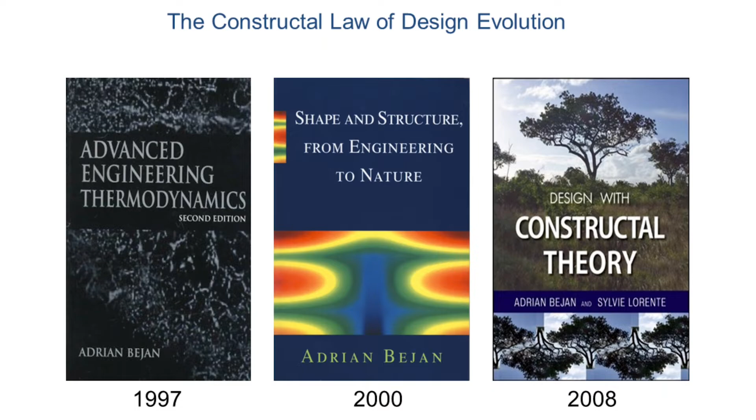In fact, the thermodynamics and the heat transfer and the design that I just mentioned constitute one subject, which is the science of design, or the science of form and then evolution of form in the direction of greater usefulness. My research is the same as my teaching. One is the other, like the hand in the glove.

And the courses that I teach are on thermodynamics, which are illustrated in the book covers that I'm putting in this video. The same with heat transfer. And when it comes to evolutionary design, also known as constructal design, I have spearheaded that domain of science as well.

My view of scholarship, which, by the way, is what I'm teaching to the students who come to me, is that the primary purpose of being in university is to learn how to engage productively in doing creative work. Creative work, as the word indicates, means the ability to come up with new ideas, and then with the force to implement those ideas, with the audacity to do something different, something that may be more useful.

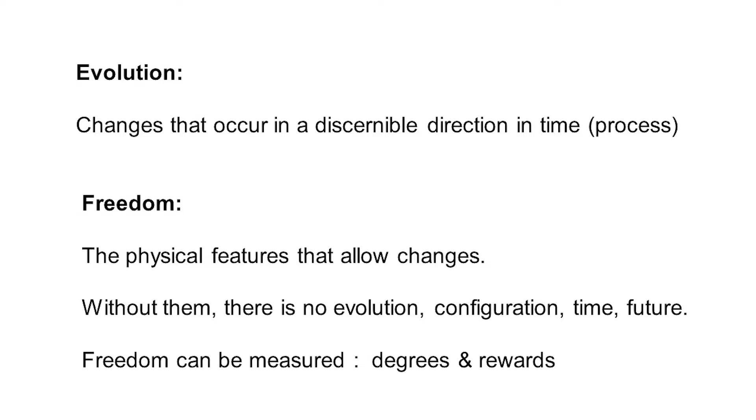Second, freedom is the one word for all the physical features that endow the object or the system with the ability to change. No freedom, no change, no evolution, no configuration for that matter, because configuration comes from an evolving design, and that means no direction of time and no future.

Now, it may surprise you to know that freedom can be measured. We can measure it, as I will show, as the number of degrees of freedom that the object has at its disposal. And also, freedom can be measured in terms of the effect of these degrees of freedom on performance, efficiency, and benefit to the user.

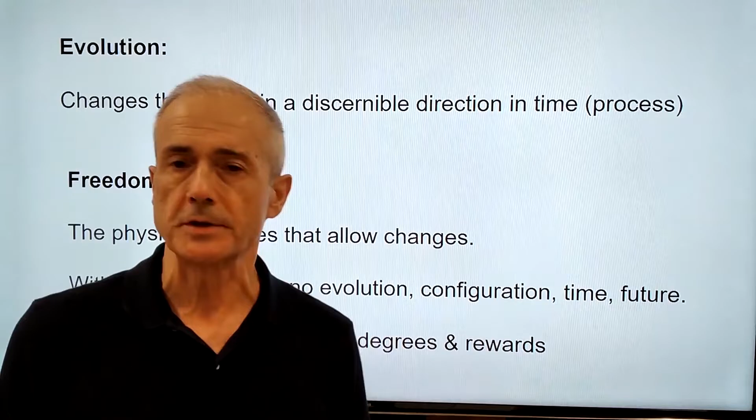We get this idea even better if we question the meaning of evolutionary design. Here I have an icon of where we all come from and where we're going. Everything in nature is a moving system that morphs with freedom.

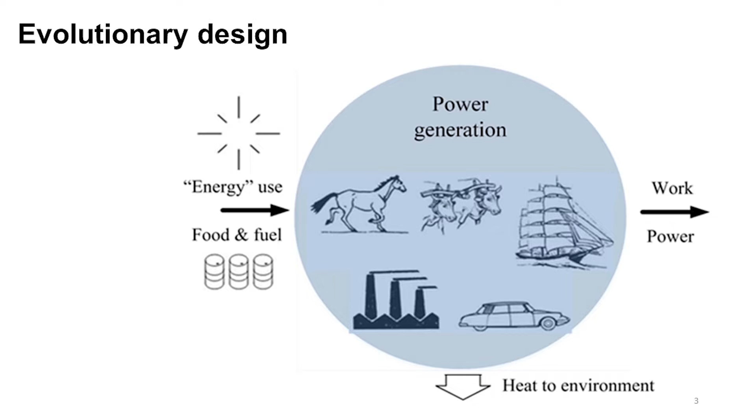This is an icon of the book of Thermodynamics. We call it a thermodynamic system. In the blue domain, it is powered by heating from a source. This energy stream is converted partially into work or power, and the remainder is discharged necessarily to the ambient.

In the blue domain, I sketched many configurations, some very old, some a lot newer, and they suggest that the design that facilitates the converting of heating into work has been evolving. So that is evolutionary design, and it's only half of the picture.

The complete picture is shown here in the rectangular box. The previous drawings are in the blue domain called engines, with what I just told you around the engines: heat in, heat out, and work out.

The point is that the work is dissipated instantly by moving something against its will, that is, against its environment. That movement dissipates the work completely. It dissipates it into heat.

So from a distance, and if you look again at the rectangular box, heating in, and then heat rejection 100% from the rectangular box. But in the meantime, or inside the box, movement has happened in the horizontal direction on the Earth's surface because of the presence of evolutionary designs, both in the blue domain and in the green domain.

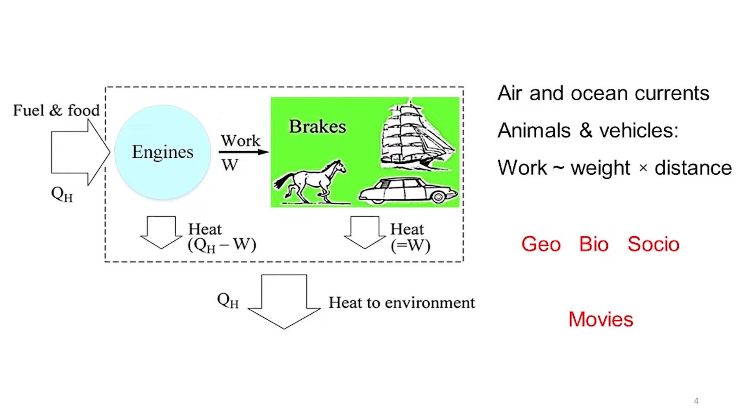So the designs are evolving toward being better, which means that through evolution, the movement itself becomes farther and more efficient and longer lasting.

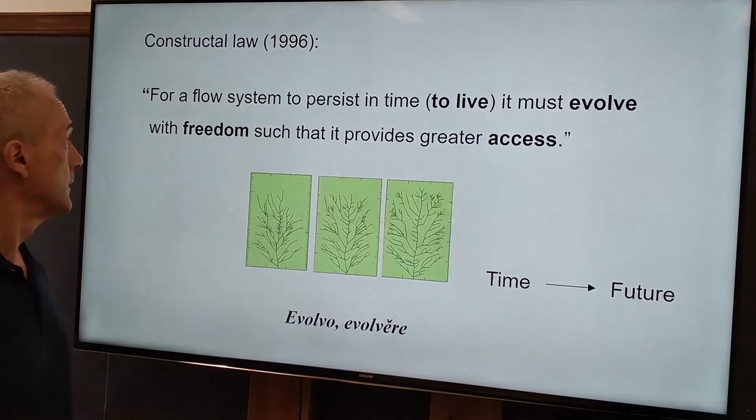To account for this new aspect of the thermodynamics that we practice, I stated in 1996 the Constructal law. I'll read it to you: for a flow system to persist in time—this is the definition of to live—it must evolve with freedom such that it provides a greater access. Let me explain.

This is the physics definition of life, because in thermodynamics we already have the physics definition of death. It's called the dead state, the being of a system where nothing moves. There's no flow, nothing changes. The boundaries are not showing deformations over time, and so on. So the life state is the antonym, the opposite of the dead state.

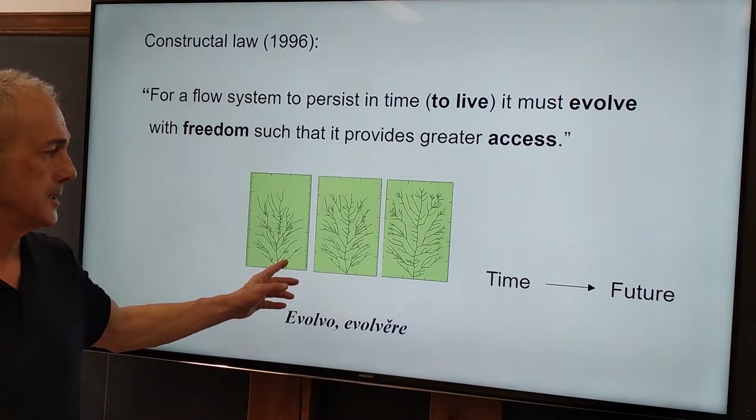I have here an example of a laboratory demonstration of the evolution in time of a river basin. From time frame to time frame, the architecture is changing, it is morphing, it is always tree-like or arborescent, but there is a direction in time which you can show through measurements. It is toward flowing more and more easily, meaning the water on this horizontal area being driven by gravity by smaller and smaller drops of altitude. The green is really sand, originally of uniform thickness, on the floor of a laboratory.

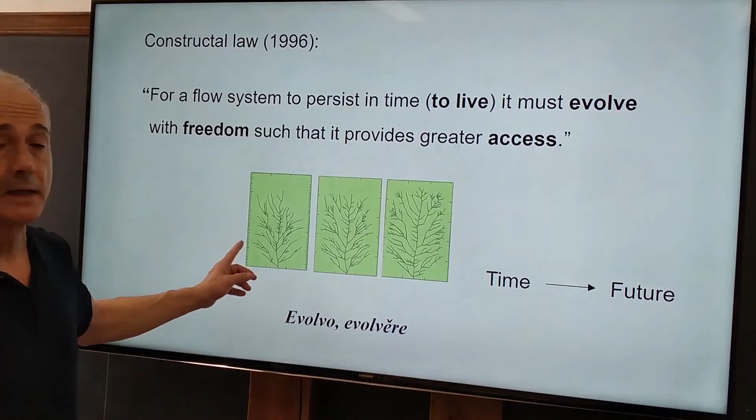And so the movie plot from left to right is in fact the time arrow, which is brought into thermodynamics by this statement.

One more thing, evolution, the concept, is as old as science itself. It comes from the Latin verb evolvo, evolvere, which means to roll out, to roll forth. This word makes the mind think of the image of childbirth. Everything that is born or nascent is due, it comes out of Mother Nature, a feminine entity.

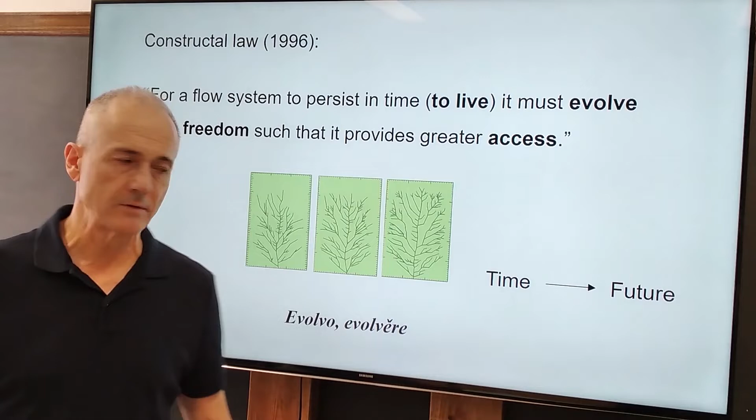Natura in Latin means that. This is a mother word that has given birth to many other words in the language of science that we speak today. I mean the word valve, vulva, or Volvo, the brand name in the Swedish automobile. All these words have the same origin as evolution itself.

Now, with this law of physics, many researchers today have shown that it is possible to predict not only the evolutionary designs that have been observed and documented, but also to predict the future of these designs over time. This is a panel of the designs that endow all sorts of systems on Earth with locomotion, that is, movement driven by power, swimmers, runners, and flyers. You have here a surprising agreement between the observed speeds of locomotion versus body sizes.

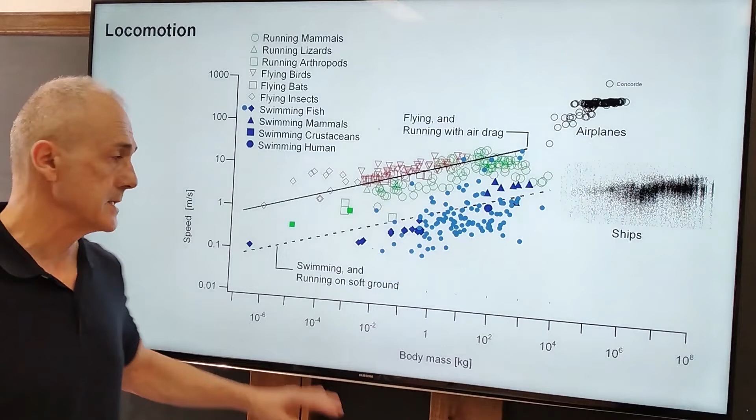The body sizes cover a huge territory from the housefly to the biggest ships. This unification of movers on Earth is a drawing coming from me that has been evolving over time. The ships are the most recent addition. They show basically agreement with the swimmers. The airplanes, they appear to be deviating from the line of the flyers.

More recently, they've been brought in line with the flyers, the animal flyers, by taking into account the fact that the density of the medium in which the fastest airplanes are traveling is sensibly lower than the density of the atmosphere against which animal flight is designed. And so this success, which is the agreement between all these dots and the theoretical lines shown here as two parallel lines for flyers and swimmers, this success is accompanied by a cloud-like distribution of data, a diversity, if you will.

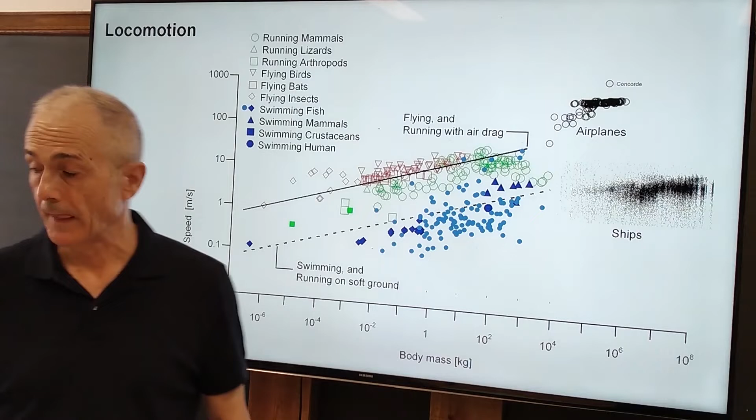Very soon you will see a blow-up of this region of the fastest movers versus the body sizes. And that is how the next idea comes on the screen. The cloud itself is about diversity hand in hand with the predictable trend.

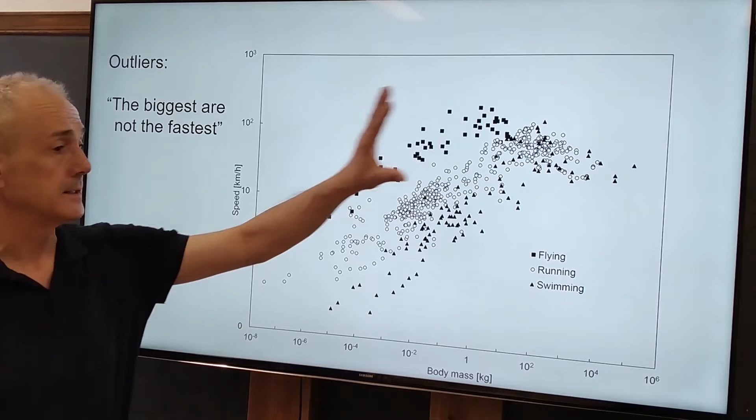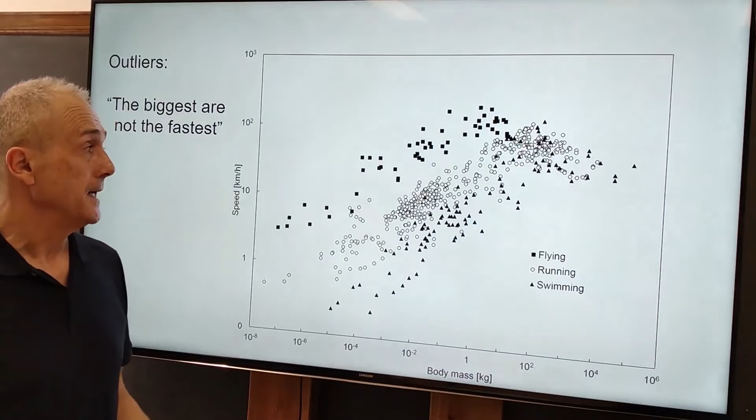This is a blow-up of that right-hand extremity of the previous drawing. We have the body sizes, we have the speeds, and here you see in each of these groups, flyers, runners, and swimmers, that the fastest are not the biggest. The biggest animals are somewhat slower than their fastest relatives. And this hump has been used by many as an argument that the general trend is incorrect.

And the slogan of that particular point of view is that the biggest are not the fastest. It turns out that, in fact, the biggest are the fastest.

What we have here as coming from zoology are the maximum speeds. And of course, the maximum speeds of animals have to do with the lifestyle of the animals. So the fastest animals, flyer, runner, or swimmer, are in fact the predators. The really big animals that are fast but not the fastest are the grazers, the ones that move all the time and of course eat all the time.

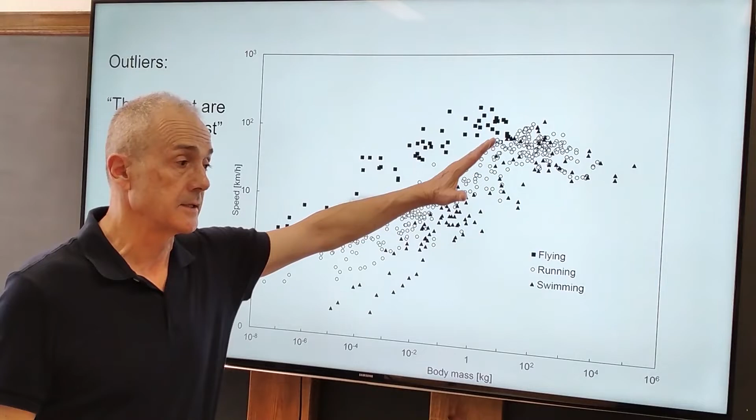So the speed average over the lifetime of the mover turns out to be in accord with the prediction that the trend is toward greater speeds, average speeds, as the body size increases.

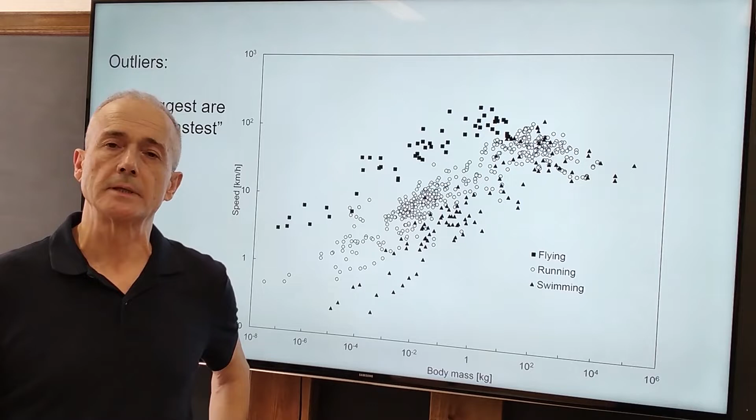You can see this very clearly if you think about the evolution of airplanes. We have big commercial jetliners that are fast, but not the fastest, yet they fly all the time. They spend their lives almost entirely flying, compared with the lives of fighter jets. Well, the jet fighters are spending most of their time hidden in the hangars underground.

So, in other words, just like the cheetah is mostly at rest, the lion is mostly asleep, the house cat is mostly asleep. Yes, all of them are fast, just like the sprinter in the 100-meter dash, when the feeding time comes.

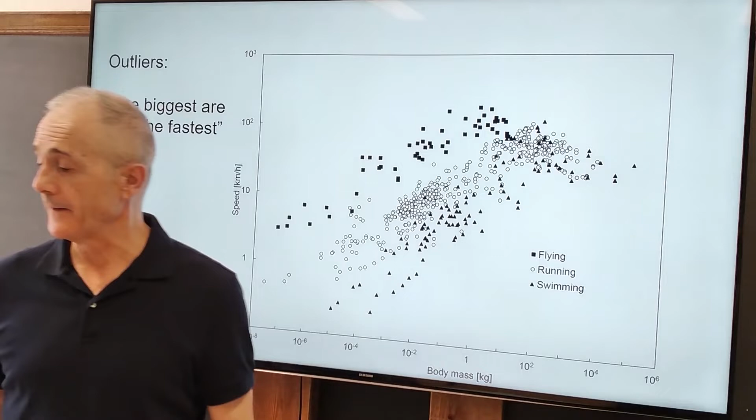There is diversity everywhere. No one would confuse the hummingbird with the albatross, or the house cat with the lion. And this diversity has its own physics, meaning if you know it, you can predict the diversity. You get that idea if you make drawings the way I do, all the same size. Comparing the cat with the lion, the cat is mostly belly with small legs, while the lion shows more legs relative to belly, and the elephant is even more exaggerated in that direction of greater legs.

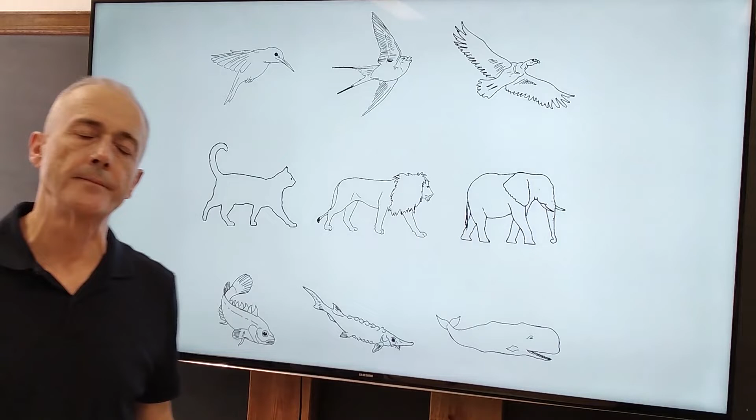It turns out that with physics, and the mechanics of the lifting organ, which in this case is the legs or wings, or the undulating tail in the case of the swimmer, the mechanics of this periodically flexing lifting organ calls for this relationship between the body fraction occupied by the lifting organ and the entire size of the mover. That direction, I hope, is of interest to you, the audience.

I continue with examples of the artifact, with reference to the problem or need to cool a finite volume, shown as a rectangle here, a finite volume that generates a fixed rate of heating, and this volume is populated with objects that are generating the heat.

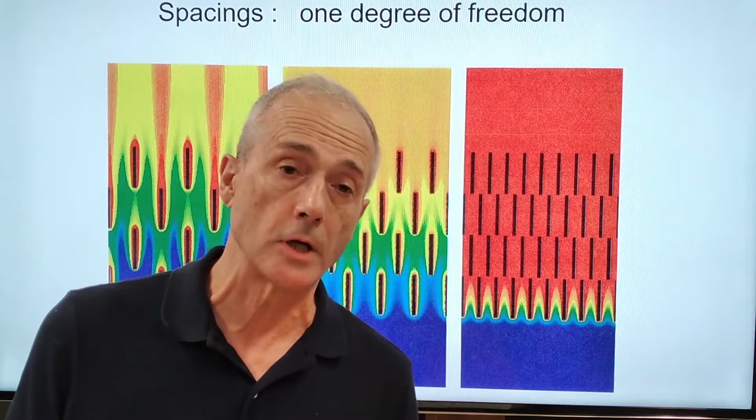The drawing has 1 degree of freedom, which is the spacing between these staggered plates, and there are 3 designs. The extreme on the left has big spacings, meaning few plates. The one on the right has many plates and tiny spacings. Of interest here is how hot the whole box gets. Clearly it's hot on the left and hot on the right. It's coolest in the middle. This is the discovery that comes from having endowed the drawing with freedom to morph. So the recommended spacing, or recommended number of plates, is the secret worth knowing.

This secret has been carried in many directions during the past 2 decades, from left to right - that direction points toward more than 1 degree of freedom. From the left is the same heat generating package cooling problem, this time cooled by forced convection. The staggered design has more than 1 degree of freedom, because you can vary not only the spacings, but also the spacings between the columns of these plates.

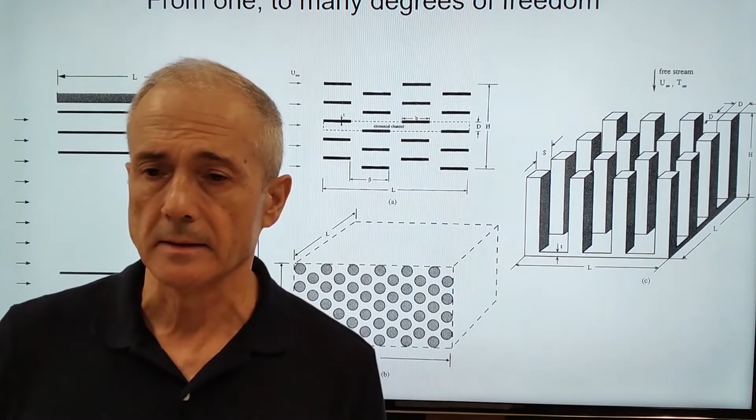We have tubes, a bank of tubes in cross flow. There are vertical spacings, horizontal spacings. There is also a choice between the pattern, triangular or square, and so forth. On the right, we have the heat sink populated by a little forest of pin fins - another configuration, 3-dimensional, to which I will be returning shortly.

Another way to remember the secret of evolutionary design, in this case with 1 degree of freedom, is that the recommended or optimal spacing, the choice spacing between those plates, is such that it is of the same scale as the thickness of the boundary layers that coat each plate. So the boundary layers are invisible, but they're actually visible in the imagination of you, the viewer, who has studied heat transfer from my textbook. If you know the boundary layer thickness, you know how to size the spacing between these heat-generating components.

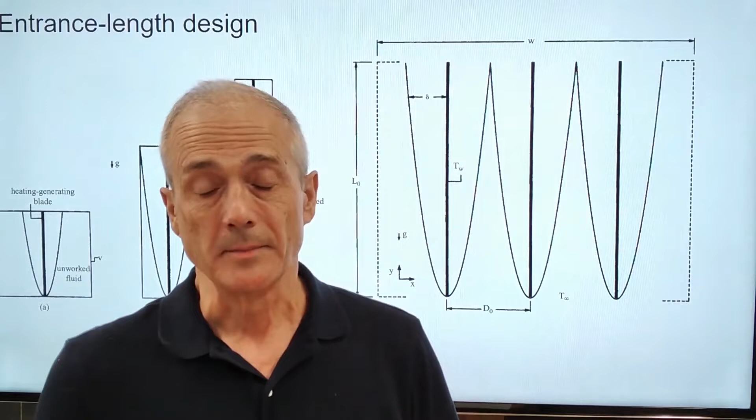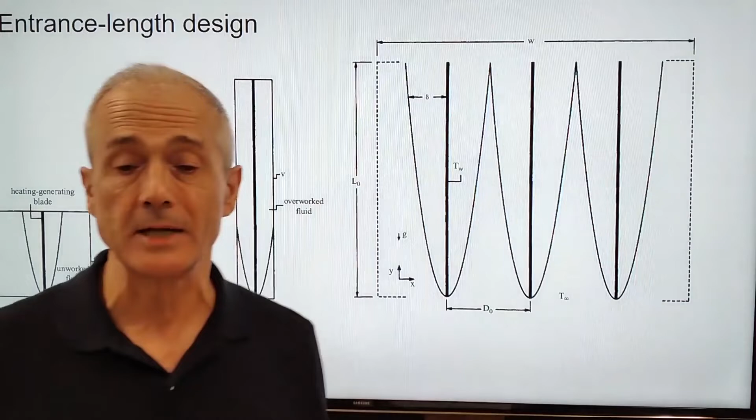So now the recommended spacing is here on the right, in this package of vertical plates. Therefore, the design is such that in the box you install the boundary layers the way you would install crayons in a crayon box. But another way to remember it is that in each channel, the flow itself is developing, along a length that matches the entrance length of the flow. So the other name for this entire design philosophy is entrance length design.

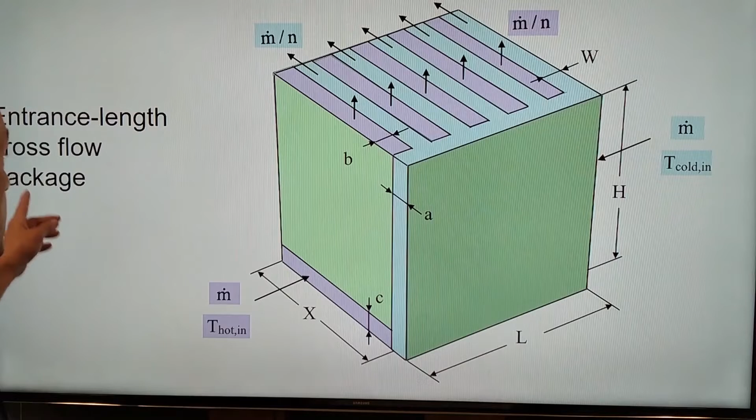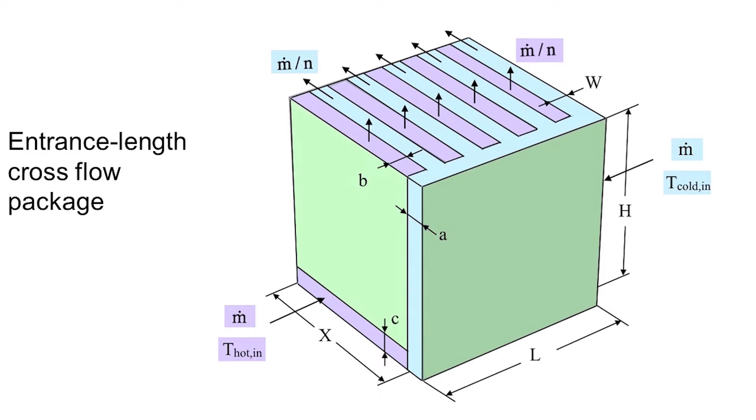This idea has been extended in several directions, including in 3 dimensions. Here's an example of entrance length design for a package of 2 streams in cross flow. There's a purple stream entering as a sheet from the left and flowing upward through 5 fingers, each finger of entrance length dimension. Then a second stream coming in blue from the right, proceeding to the left with its own 5 fingers of entrance length. That's what you do with a concept.

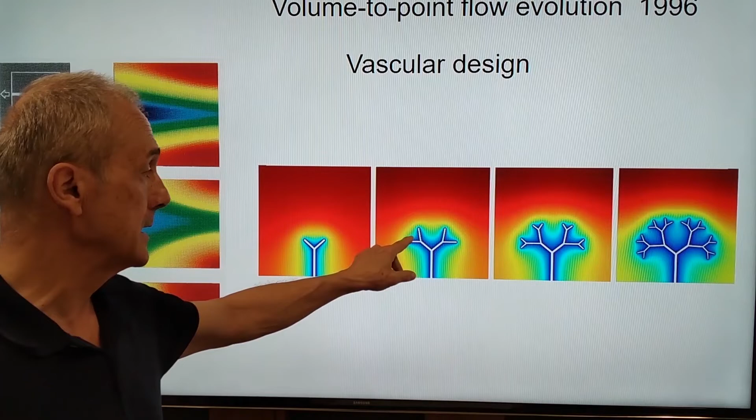Among the degrees of freedom are all these angles between tributaries or branches, and so on. So on this slide, what emerges is the philosophy of vascular design, which is in fact the big, now grown-up baby of the original problem for heat conduction.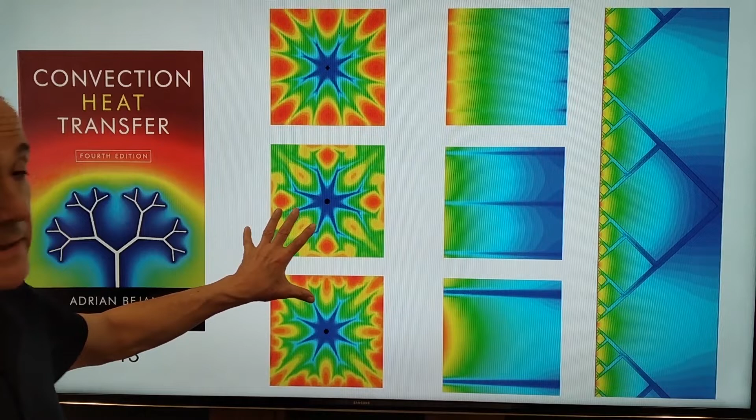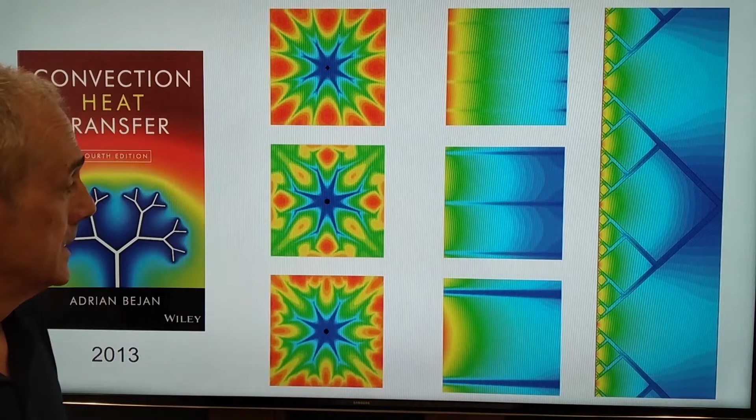Similar architectures have been developed for convection. This is in fact from the cover design of the fourth edition of my textbook, Convection Heat Transfer. Here are pictures of the temperature distribution affected by a coolant, actually cold fluid, exiting from the center and invading a plate that generates heat uniformly. In these other two panels, the coolant comes from the right, and the heating in two dimensions comes from the left.

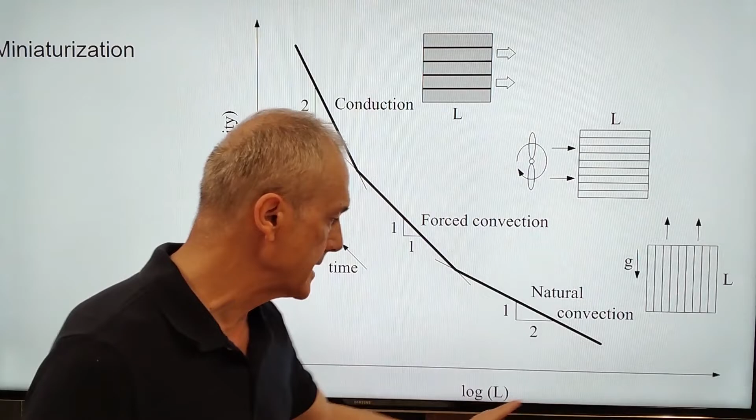Another way to look back at what most of us know about cooling packages that generate heat is to summarize the behavior of the heat transfer density in the package versus the length scale, capital L, of the package. If the package is cooled by natural convection, meaning updraft, as in my first example in this presentation of spacings, then the heat transfer density on this log-log plot is increasing monotonically as the length scale of the package decreases. If the package is cooled by forced convection, that behavior continues, but at a faster rate.

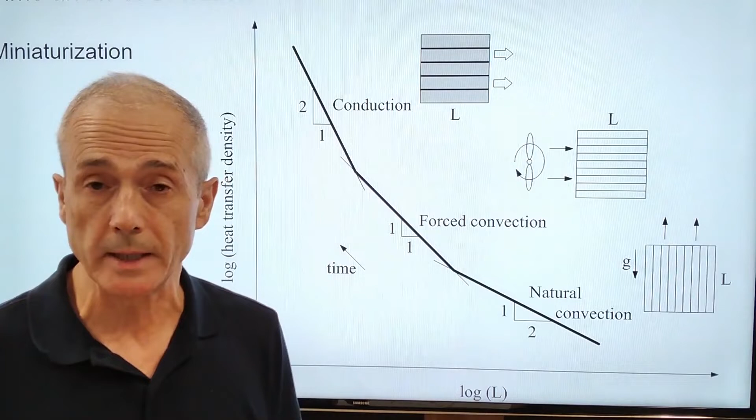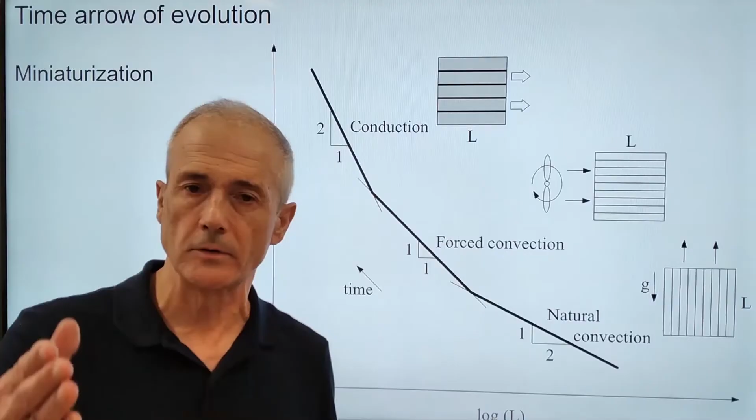If the same package is cooled by solid body conduction, as in my more recent examples, then the progress toward the greater heat transfer density at smaller scales is even steeper. So, with this story of the evolution of cooling technology, we have a crystal ball in which we see the phenomenon of evolution everywhere in nature.

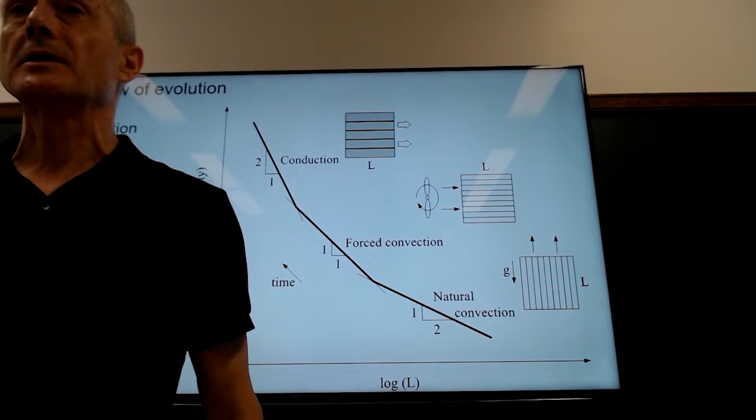It is gradual, and then boom, it is replaced when the species is outcompeted by a new species. And the new species rules the landscape when it is outcompeted by yet another species. It doesn't mean that the previous species are vanishing right away. It means that in the direction from low density to greater compactness, the landscape populated by these designs becomes more complex and much more effective in removing heat transfer from packages of, in this case, electronics.

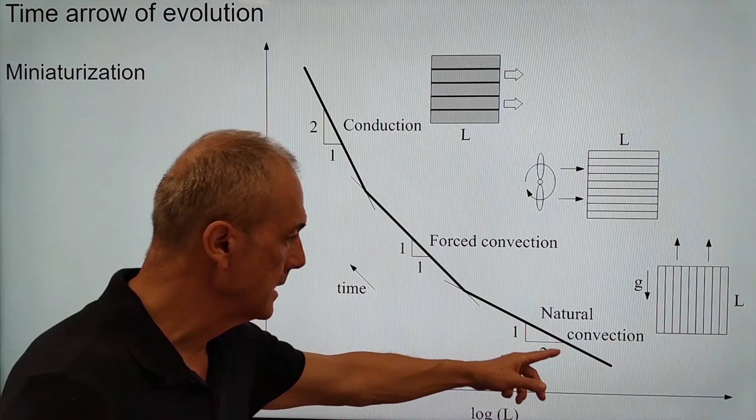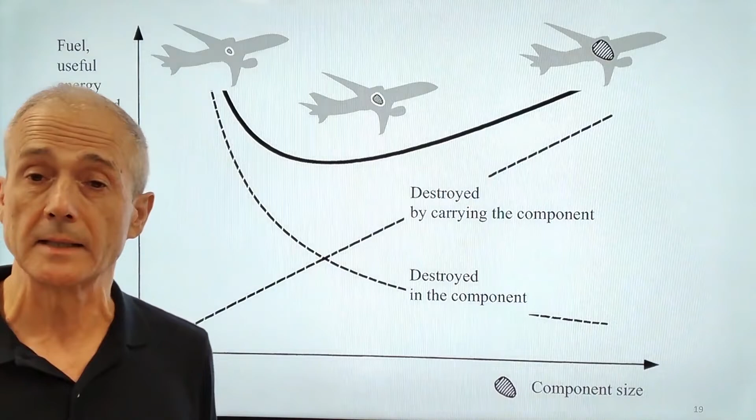We know from thermodynamics that a flow component destroys useful energy, or exergy, because of friction in flow passages or heat transfer across finite temperature differences, which are finite because the heat transfer surface that's pierced by the heat current is not of infinite size. So when the size of the component increases, the irreversibilities associated with the component decrease. And this is an attractive direction in which to think.

It turns out that this is a mirage, because in the same direction of greater size, the size of the suitcase that the big mover has to carry, the suitcase is called a component, increases, and along with that increase comes a linear increase in the destroyed exergy because of having to carry the component. So the trade-off between the two dashed curves proclaims the existence of a recommended organ size for a particular body size. This is why big trucks have big pumps and big birds have big hearts.

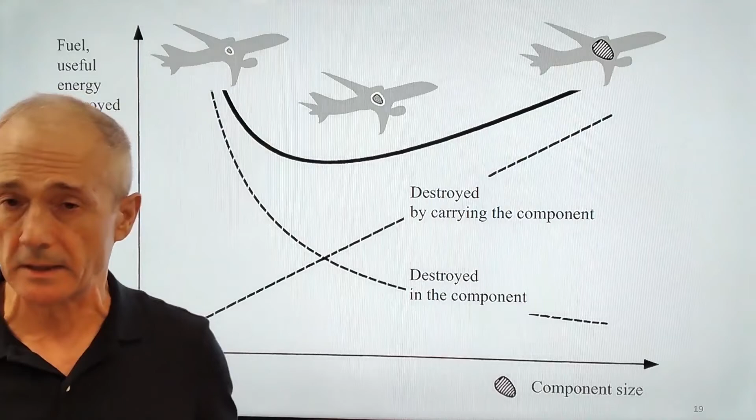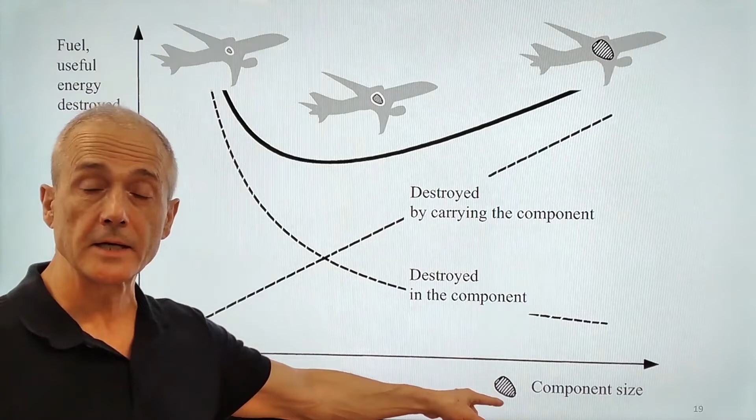And now the answer to the question that I just posed before the slide has to do with the fact that with evolutionary design, the flow architecture of the organ improves.

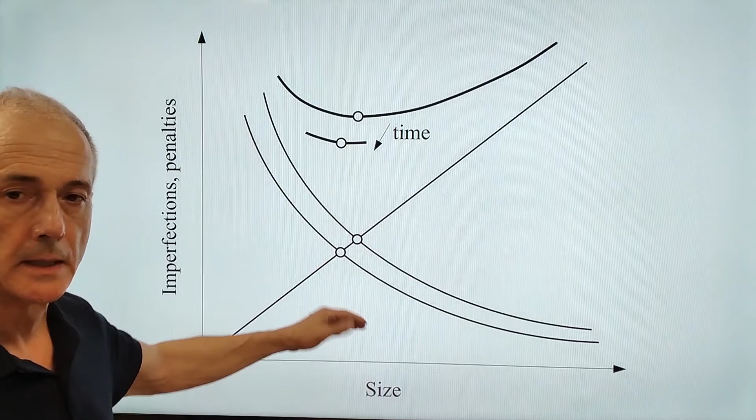From flow through parallel tubes to flow through arborescent, tree-like tubes, this descending curve has in its nature the tendency to migrate downward. That means the drawing morphs, with the descending curve migrating downward. So the sum of the two curves, shaped as a bucket, has its bottom dropping and its lowest point migrating to the left.

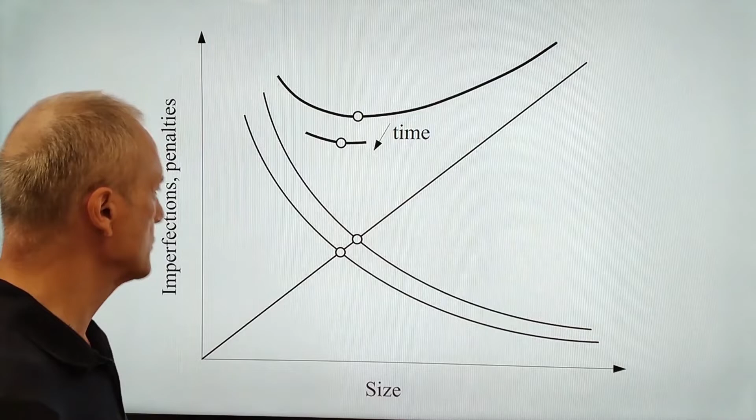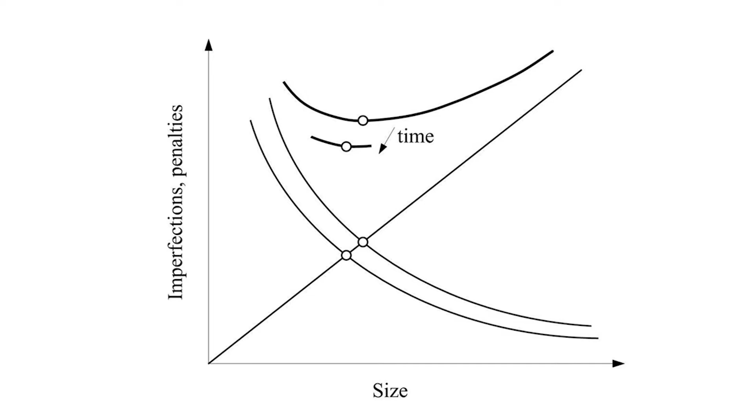Where? Toward smaller sizes. So the emergence of smaller components on finite size movers on the landscape is natural, because in that direction the movement of the big is facilitated more. Freedom at the level of the component evolution translates into rewards for the movement of the big, which is of course the beneficiary of all the designs that inhabit it.

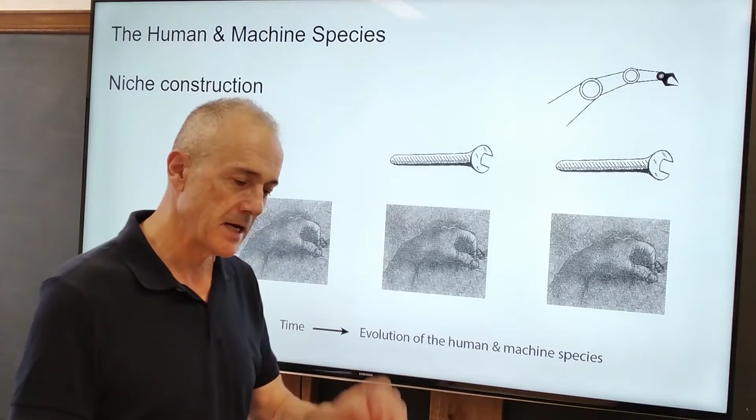The important observation to make here is that in evolution, what works is kept. The wrench did not make the naked hand obsolete. Let's call it the intelligent arm, it will never make the plumber's wrench obsolete. So in evolution, what works is kept.

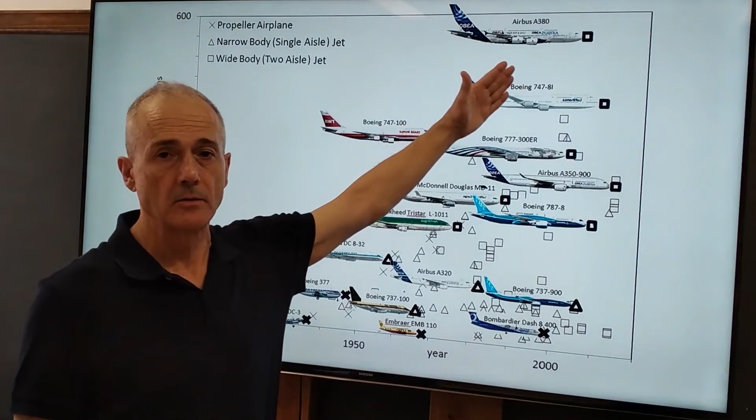Here's the population of models of airplanes versus, on the abscissa, the year when each model was adopted. On the ordinate is the size of the flying body. Obviously this is a hill or a mountain, the crest of which is rising over time. The biggest models are joined, say, a decade later by even bigger models. But that's the trivial observation.

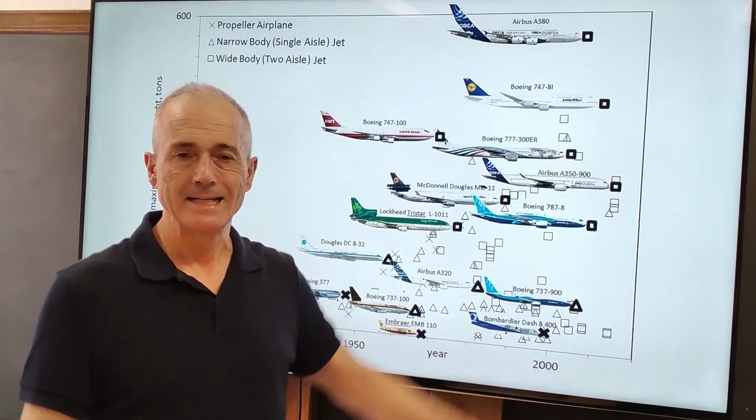The subtle point is that at any particular time during one given decade, the new models are arriving in all sizes, small and large. Even more subtle is that the new models that arrive are such that the small are many, they're all new, small are many and the big are few. And that is called hierarchy.

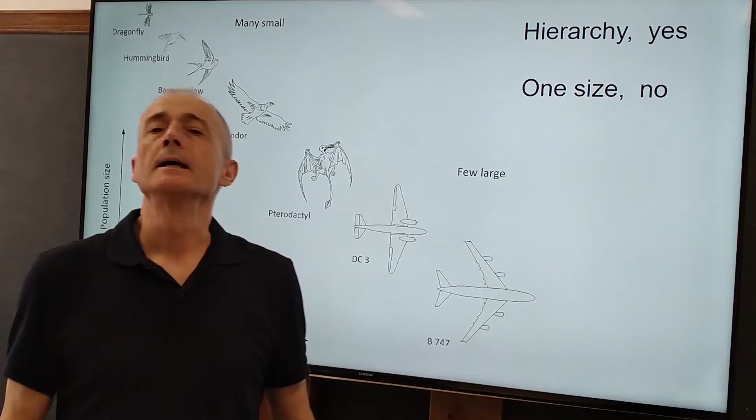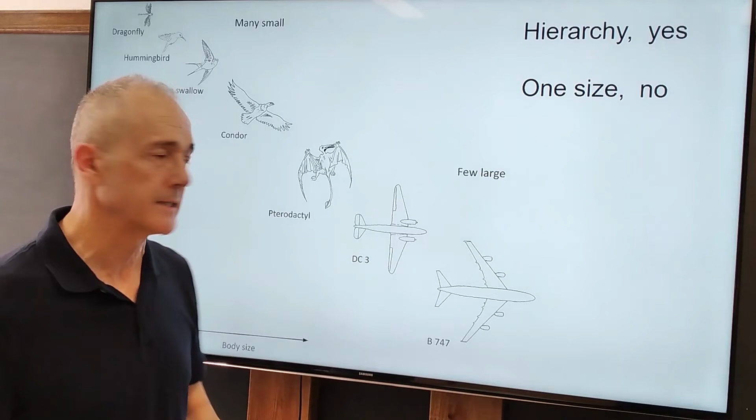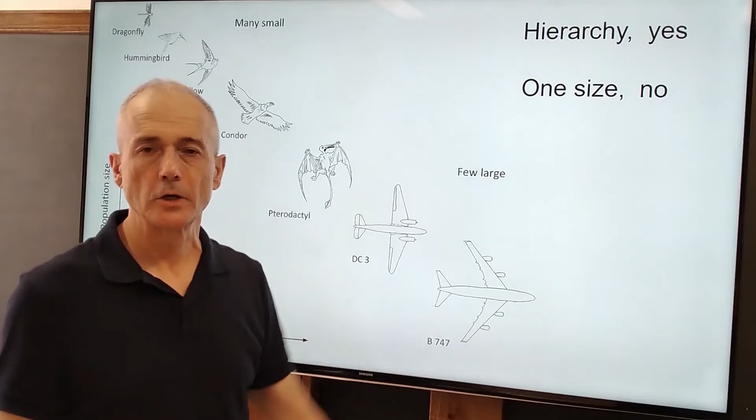It's more evident if we look at all the flyers, beginning with the birds and of course pterodactyl. The point is that in a two-dimensional plot of population size versus body size, qualitatively there's a straight line on a logarithmic plot, a descending line from the many small to the few large. In other words, design in nature, the organization of flow systems, happens in this way hierarchically, not in one size.

Why is this? Once again, because of physics. And the answer comes as a kind of two-punch move in a boxing match. The first punch is economies of scale.

You can show with pencil and paper, as a homework problem, that a stream of water that flows through two parallel pipes of equal size flows a lot more easily through a single pipe that's more voluminous, a single pipe that has the same volume as the original two pipes. In other words, the change in flow configuration toward flowing more easily is from 2 to 1.

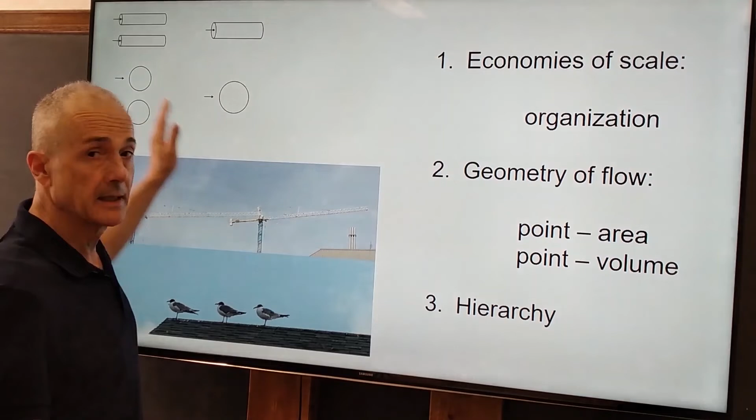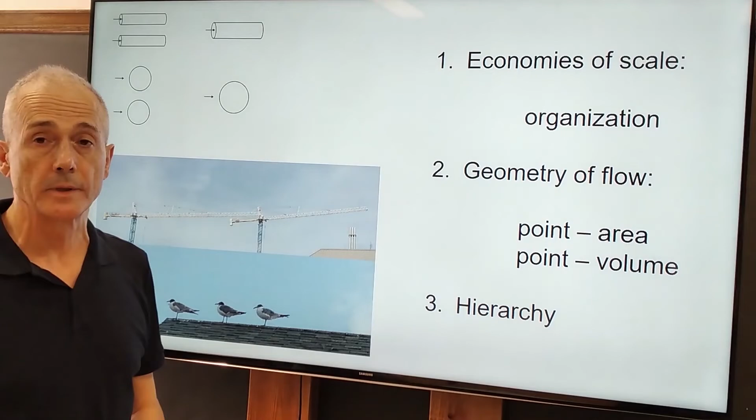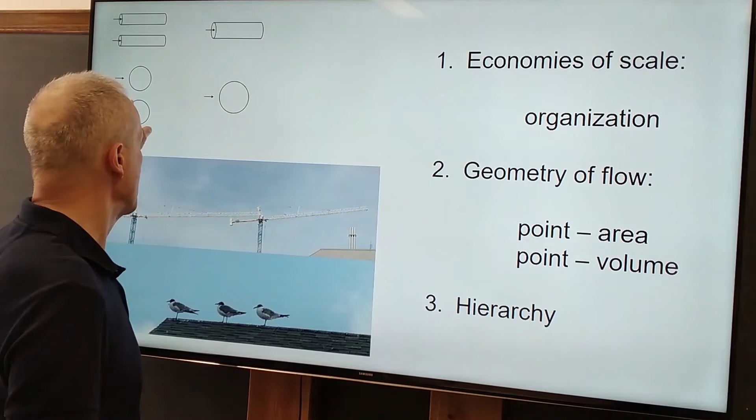That's economies of scale. You can write the equivalent problem by thinking of two small bodies, two barges on a river being pulled against drag. The barges are loaded with coal versus a single barge that's bigger, carrying the total load of the first two. You can show that the power required to drag the big one is considerably smaller than the power required to drag the previous two.

So the change toward easier flowing, from physics, is from 2 to 1. And if this is the tendency in nature to flow more easily, then why is it, or why was it, that not everything that's moving on the landscape is big?

The reason is that the flow on the landscape is not from one point to another point, as in the simplest problems of geometry. It is between one point and an area. The direction of the flow doesn't matter. It's because the point is one and the area means an infinity of points, or between a point and another infinity of points called volume.

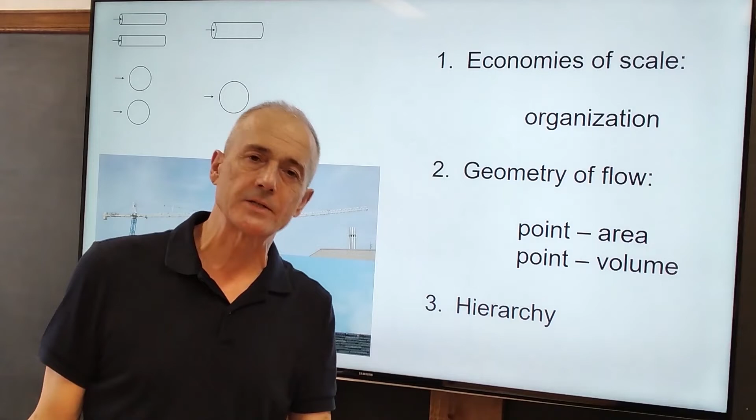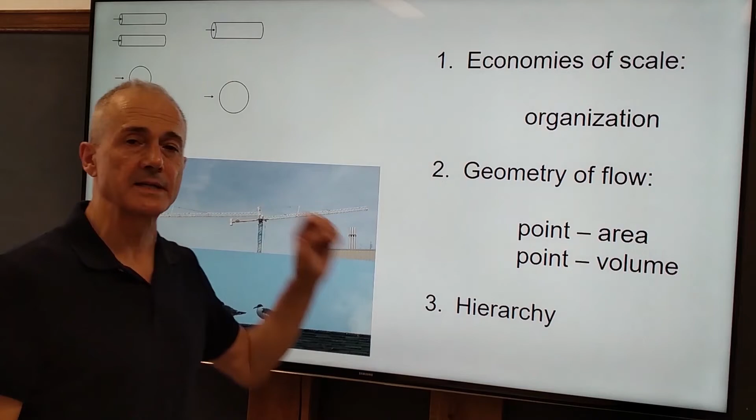And for the flow to cover the infinity of points, that flow must have access to smaller and smaller pockets of territory between the bigger territories that have been served, were wetted, were swept by the big movers anticipated or recommended by economies of scale. So we arrive in this way at hierarchy.

Another word for hierarchy, or the natural emergence of hierarchy, is called organization, or coalescence of living things or movers. You see that in this photograph that I took, two photographs, seagulls on the roof of a cottage on the seashore facing the breeze.

They do two things, actually three things. First, they come together. Second, they face the wind the same way.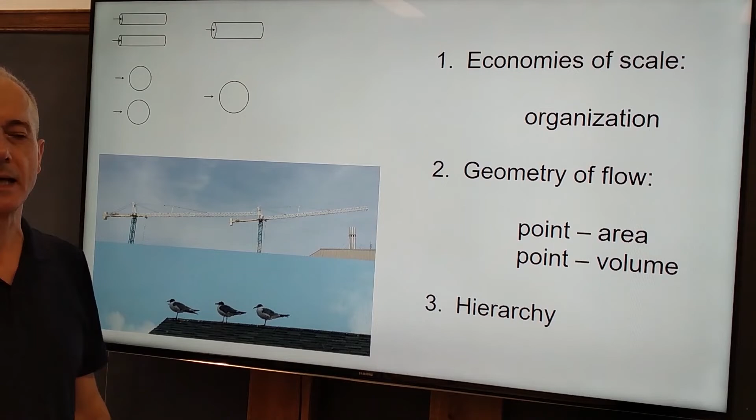Third, they space themselves such that the ones in the wake have the same spacing as the vortices of the Karman vortex street, meaning each trailing bird feels a relative push from behind, from the wind swept downstream, and that push makes the trailing bird a lazier worker in its legs, needing to do less work to stand up straight in the wind.

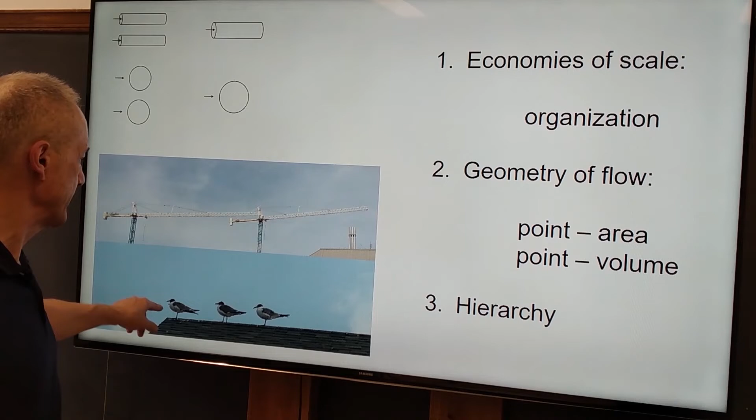Here, the upper photograph shows cranes oriented the way they stand when not working, in a strong breeze. The front of the crane, loaded with weight, has its beak on the left, just as in the lower photograph.

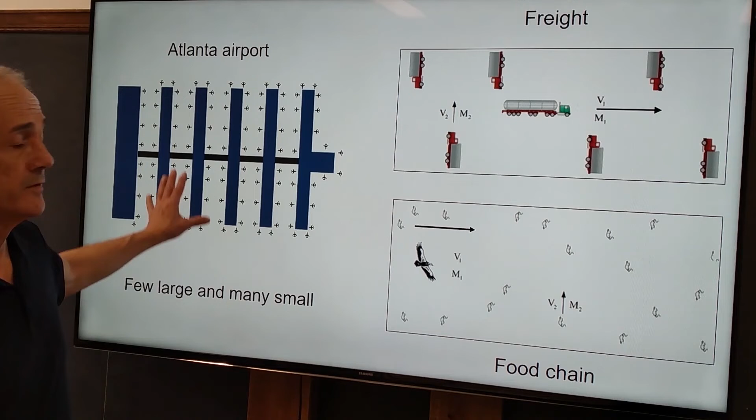This hierarchy or organization is on display everywhere: the movement of people in an area such as the Atlanta airport, few large and many small. The one large is the train, the many small are the pedestrians on the concourses.

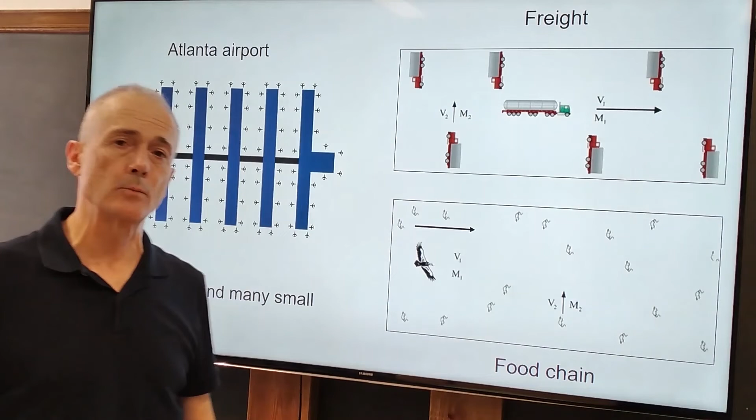This drawing of the Atlanta airport is an icon of the natural emergence of the city block, with walking perpendicular to the smallest alley. Freight on a larger area moves the same way, vehicled by few large trucks and many smaller trucks proceeding transversally.

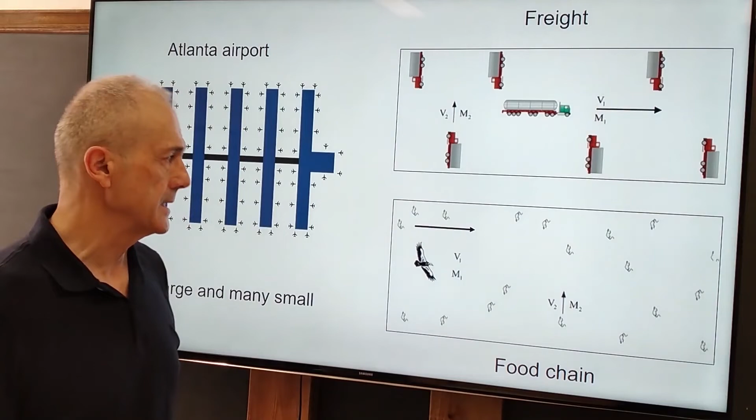The so-called food chain is really the coexistence of few large movers with very many movers covering the area in the other direction. The biggest example of this type of hierarchy emerging naturally on Earth is the movement of humanity on the globe.

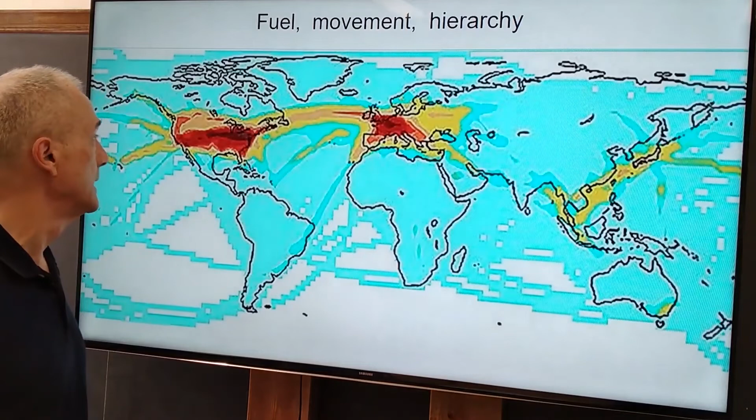This is air travel 20 years ago, illustrated by NASA in terms of the measured condensation trails behind all flying aircraft. You see where the flying is going on - that's where the red is, the heart with the two chambers of air travel. The whole globe is not traveling, so the movement is hierarchical, and that means fuel consumption is hierarchical as well.

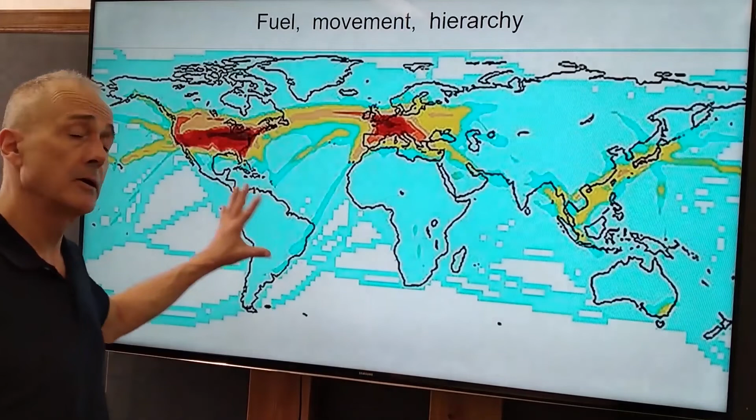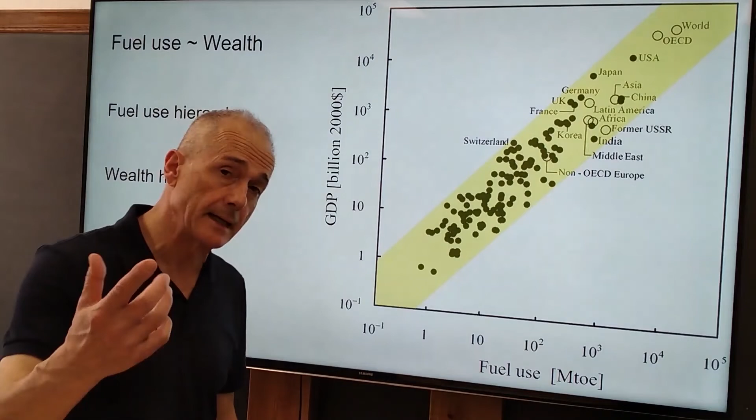This hierarchy was not dictated by the General Secretary of the Communist Party. This happened naturally, and with that idea, we can now admire another version of the facts.

Plotted here are facts about economics, hand in hand with the technology of driving movement on the planet. Fuel is being burned, of course - from fire comes power, from power comes movement, and you see here that annual fuel use is essentially proportional to annual wealth, known as gross domestic product.

The conclusion is that there is a rough one-to-one proportionality between annual fuel use and annual wealth. We've already established that fuel use emerges hierarchically, naturally. That means the hierarchical distribution of wealth on the globe is natural as well.

So the natural phenomenon that gave birth to hierarchy in air travel is the same physics that makes wealth hierarchy unstoppable, if you will, on the globe.

The subtle point about this graph is the time arrow of all the dots that occupy this yellow band - all the dots are racing upward. Listen to government reports every year; it doesn't matter which country you're concerned with.

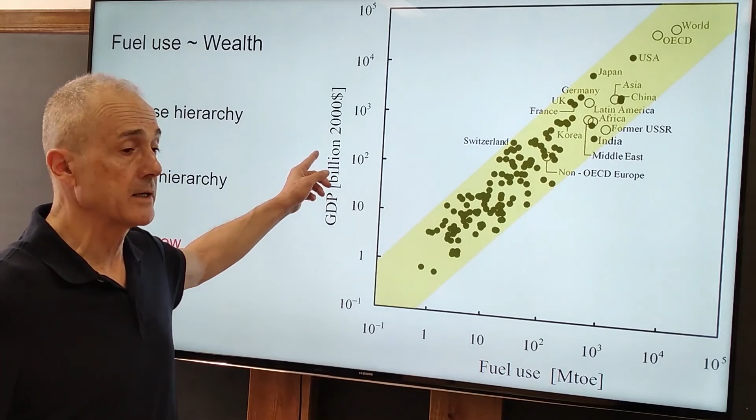Governments are interested in greater wealth or increased GDP for their population, and that means, of course, necessarily an increase from year to year in fuel consumption.

And that brings me to the concluding idea, which is that science, as a construct of the human mind, an empowering construct, is itself an evolutionary design, evolving in this direction of time that I just illustrated.

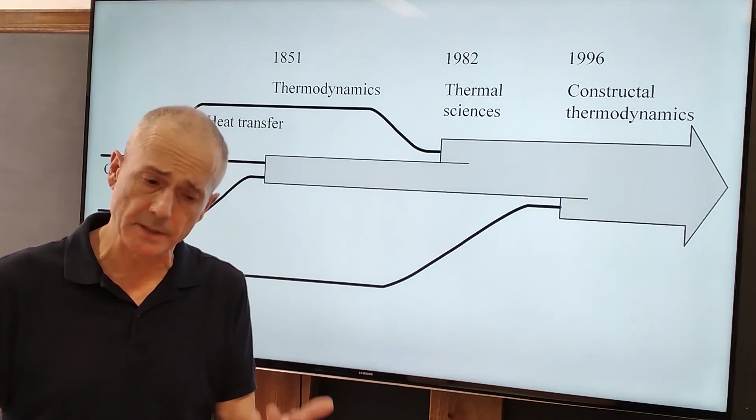And then today, meaning starting 20 years ago, bringing in the evolutionary designs - the designs that are responsible for the thickness of every single thermodynamics book. Every thermodynamics book is about contrivances that have been getting better over time, techniques for producing power from fire or producing heating and cooling from the same fire.

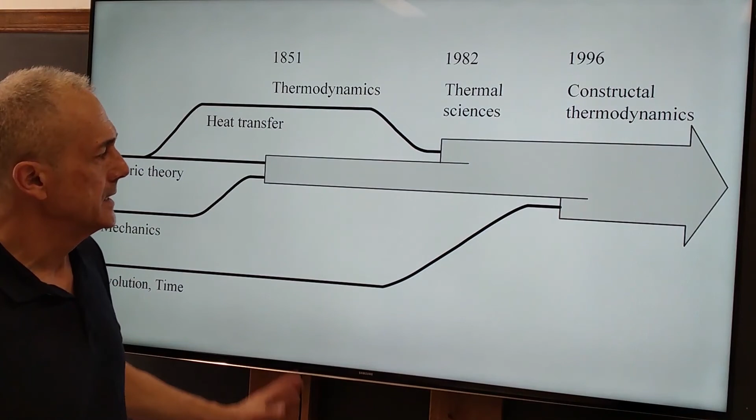Those drawings are in the books. Well, they've been evolving, they've been evolving over time. And now, with these three roots into the very fertile ground of human ingenuity, we have a thermodynamics that's, I think, much better positioned to advance forward.

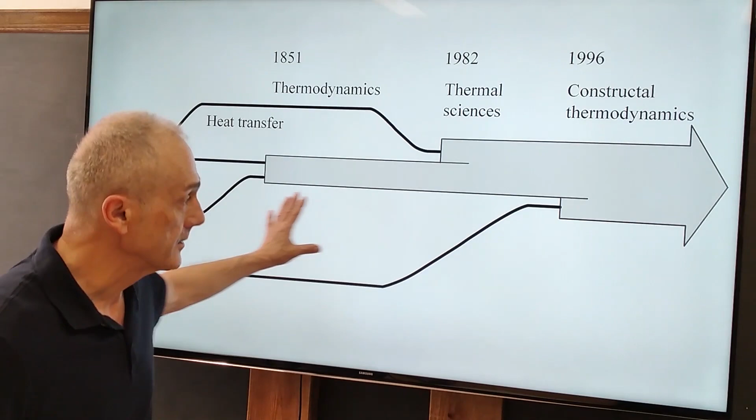Now, there's a subtle story that goes with this movie - this drawing is like the poster for a movie. The march from left to right is punctuated by individuals. From left to right, the evolution of science is speaking of the importance of freedom in the march toward performance of any evolutionary design.